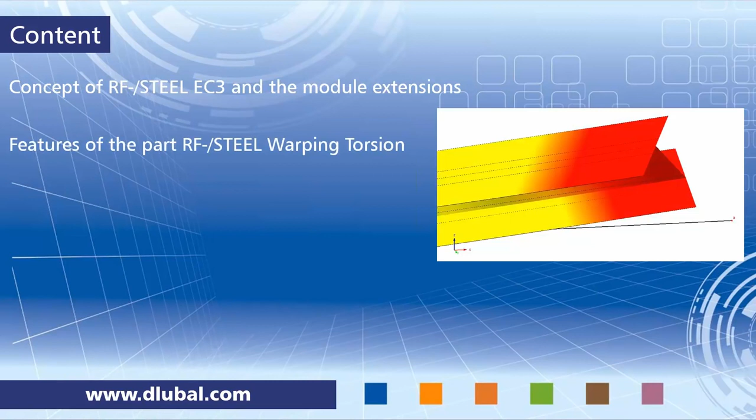We get started with the concept of the RF-STEEL EC3 module and its module extensions. I will then summarize a few features of the RF-STEEL Warping Torsion add-on module and the RF-STEEL Plasticity module. Then it's time for me to hand over the screen to Wieland, and he will show you an example in RSTAB, and he will perform stability design checks using the second-order analysis and employing 7 degrees of freedom. He will also perform a plastic design in RF-STEEL Plasticity.

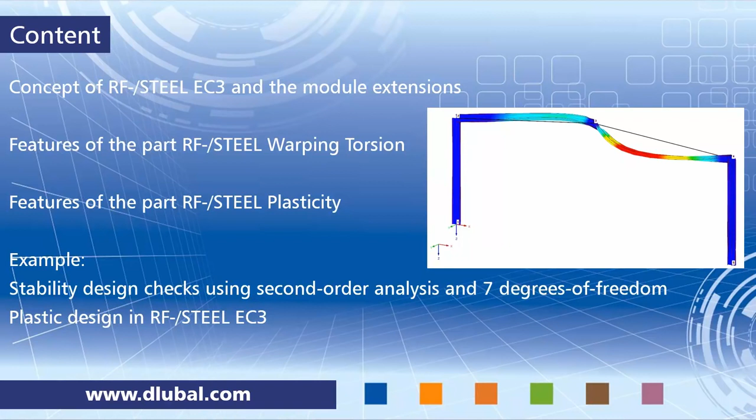Okay, let's get started with the concept. We have the add-on module RF-STEEL Eurocode 3, RF-STEEL EC3. Here you can design in accordance with Eurocode 3. You can perform stability design checks, you can do deformation analysis, and of course you can also do some fire protection analysis.

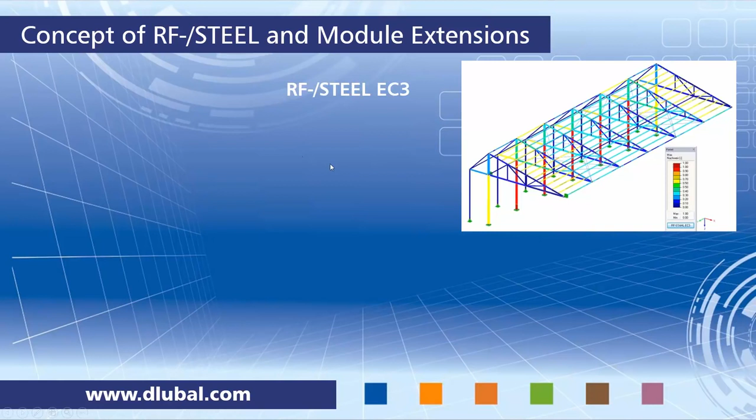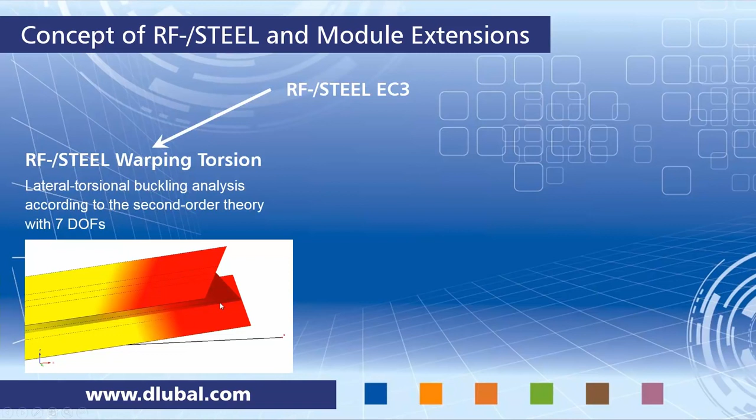And together with this add-on module you can enable 2 different extensions. One is RF-STEEL Warping Torsion. Here you perform a design with the second-order analysis under consideration of a 7th degree of freedom, that's warping torsion. And a second extension is RF-STEEL Plasticity. Here you can perform a plastic design of cross-sections. They both work either independently or you can use them in combination. And Wieland will show you this throughout the example.

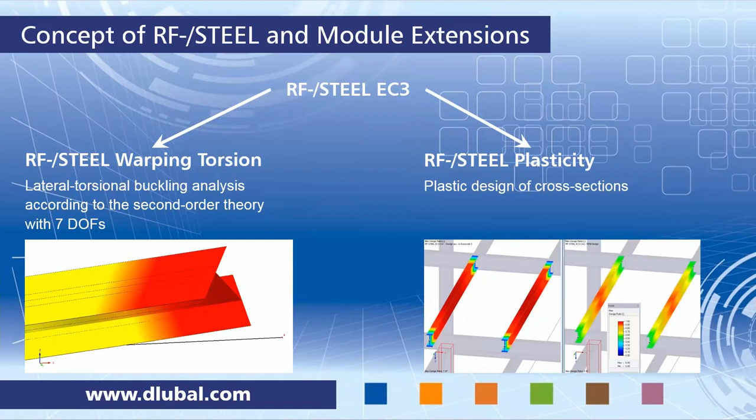To give you a bit more detail, here's a list of features available, and these are the features of the warping torsion extension. So you have a standalone solver, and this is considering 7 degrees of freedom. The 7th degree is the warping torsion degree of freedom, beside the usual translational and rotational degrees of freedom. And it is performing a nonlinear analysis in accordance with second order. You can enter imperfections, and in general this extension is available for thin-walled steel cross-sections.

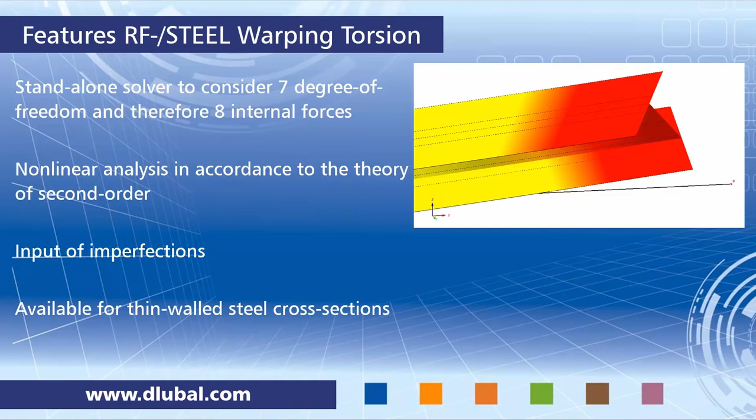For RF-STEEL Plasticity, we have different methods of analysis available. The main one is the partial internal forces method by Kindmann and Frickel, and this method is suitable for nearly all types of cross-sections. This method exists with and without a redistribution of internal forces, and a second method that is available is the simplex method. This is for general cross-sections, and another type is the analytical nonlinear optimization procedure, which is used for elliptical cross-sections.

So it's now time already to hand the screen over to Wieland. He will show you all the discussed things live in RSTAB, and just a side note, everything that is shown and discussed today is available in RSTAB and RFEM. So the add-on modules shown today are available for both program families. So now I hand the screen over and enjoy the webinar.

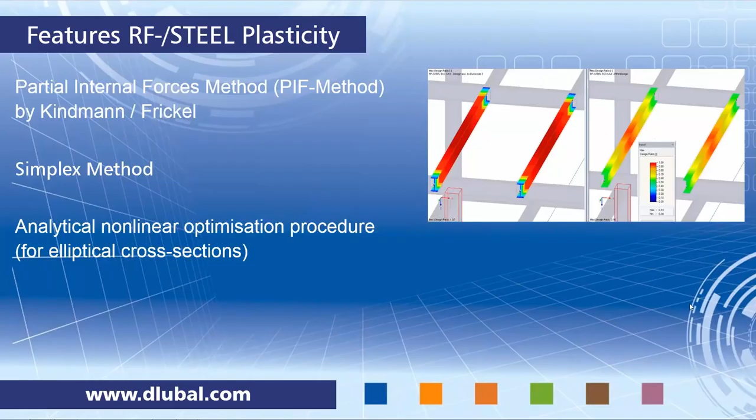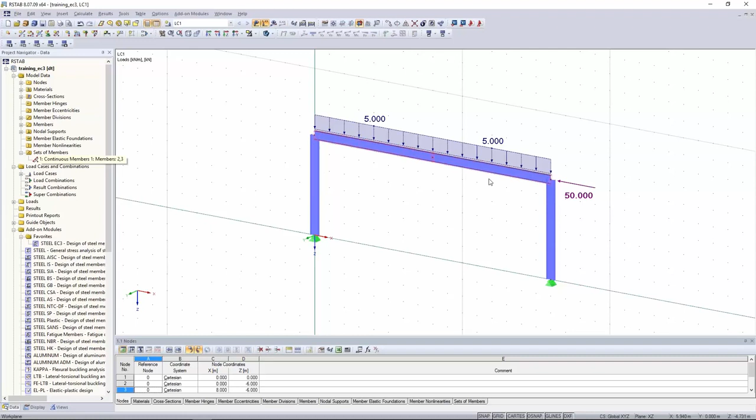So, thank you for the introduction, Gerlinde. Now it's time for the live presentation of this webinar, and I have already prepared the model to start with the steel EC3 design. You can see we have a very simple frame with a vertical and horizontal loading, just one load case. And I want to take a look at the horizontal beams, which we want to design as a set of members. It's not just one single beam, it is divided by one node, so I had to prepare a set of members to use it as one element in the steel EC3 design.

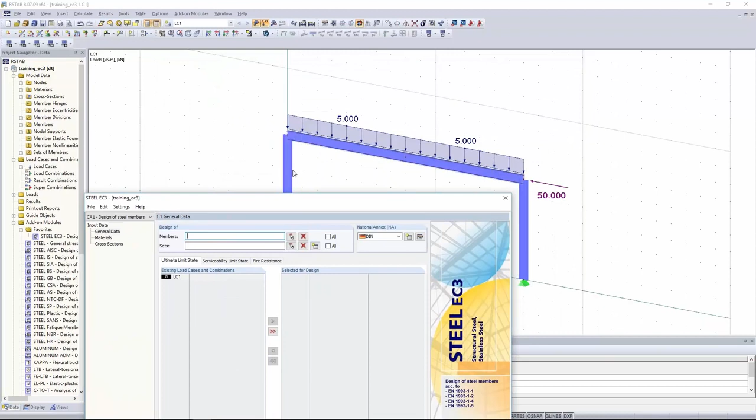Because some of you might see this module EC3 for the first time, we're going to start with just a basic design according to Eurocode 3, and then we want to do an upgrade to warping torsion and plasticity later in this presentation. So I've opened the module steel EC3. I have to select the load case which I want to design, which is the only one, LC1. I want to check my set of members, and today we want to design according to the standard in Eurocode 3.

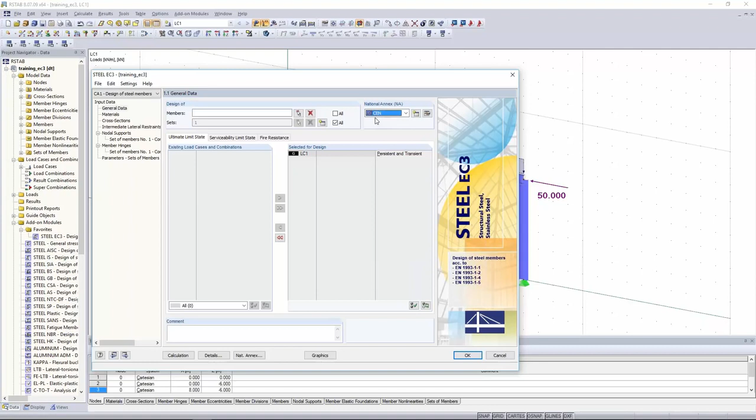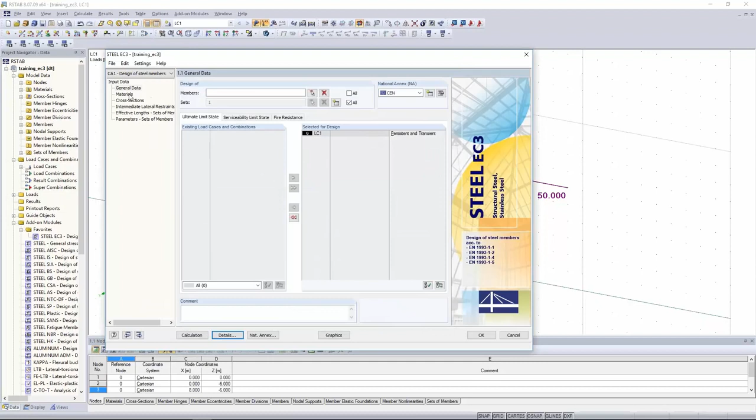In the first part of this design, I want to check this set of members not according to the general method. I want to design it according to the equivalent member method, which I can change in the stability dialog of details. Then I can continue to the next mask to check the material again, which is S235. This is fine. Cross-section is an IPE 500 section.

I have no intermediate restraints on this horizontal beam, so I can skip this mask. Otherwise, you can prepare intermediate supports along this beam as you wish.

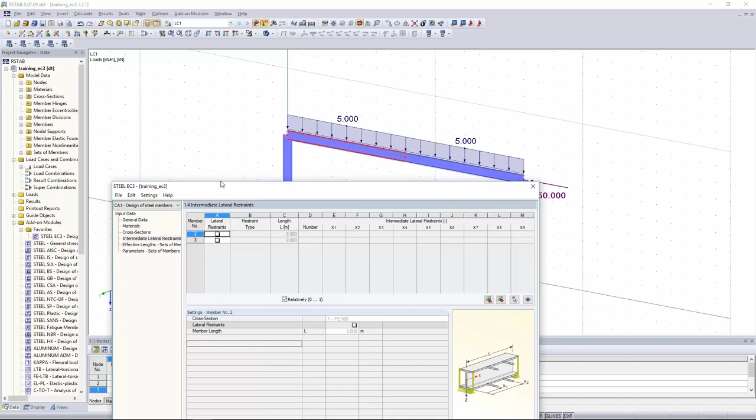In the next mask, which is effective lengths, you can define all the settings for buckling about y-axis, buckling about z-axis, and lateral torsional buckling in these columns. We want to keep it simple and design it as a simple fork-supported set of members. So all of these settings are already fine. We have buckling length factors of 1.0 in both directions, and the beam is simply fork supported.

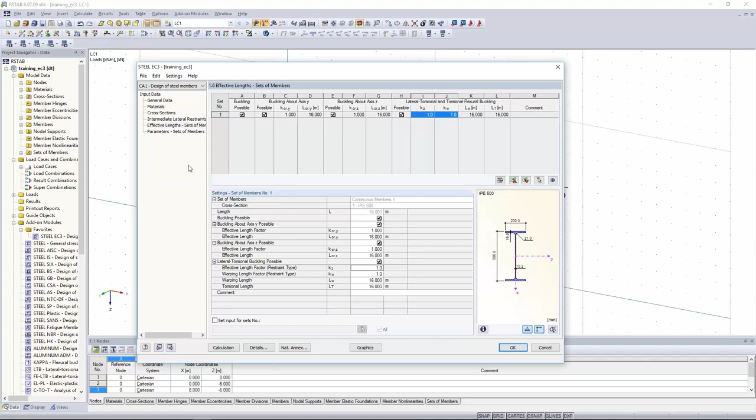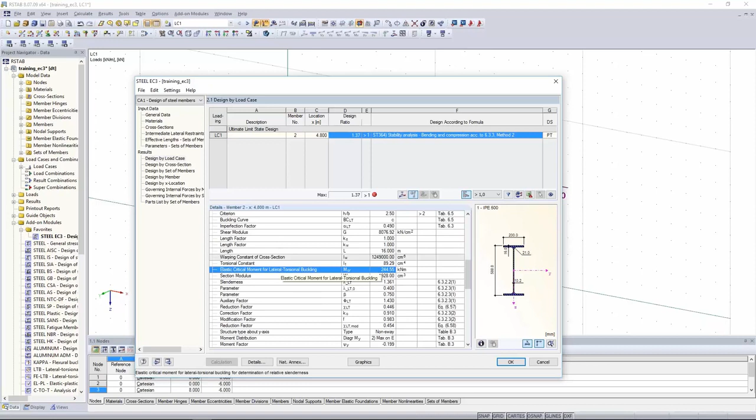So now I can just run the calculation, and you will see we have an overloaded horizontal beam, horizontal set of members here. We have a cross-section class 3, and you can check all the partial results in the design table on the bottom. So you have a part of the cross-section classification. You can see the critical buckling loads over there, and you can check almost every intermediate result in this table. You can export it, and also you can take a look in the graphic to check the results.

So there we have a class 3 section. I think this is at the place, X place, where there's no bending moment. Yes, so we have only compression force, and that's why the IPE section is assigned to class 3.

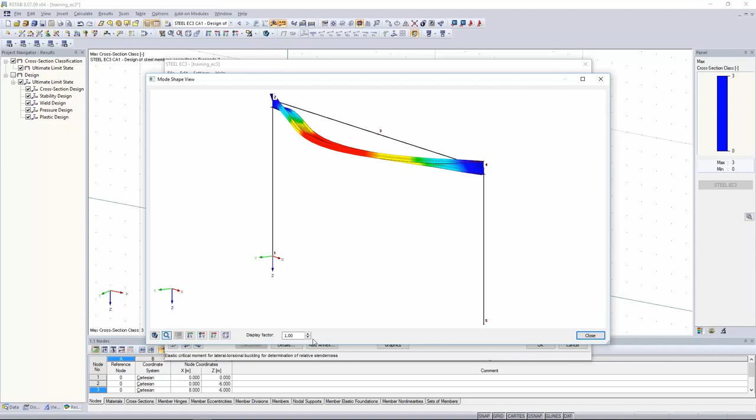Let's get back to the design module. If you want to check the eigenvalue solver, which is inside this module, to get the critical bending moment, M critical, you can check this button here, mode shapes, and you can see that there we have a lateral torsional buckling eigenvalue or eigenmode.

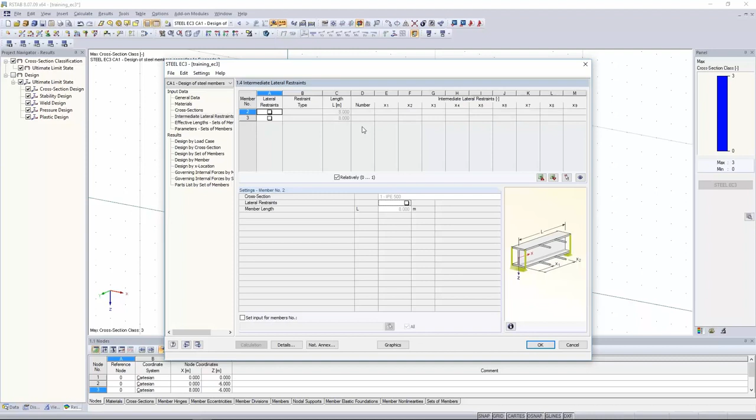And now the question is, how can I design this structure, or how can I stabilize it? Therefore you have several options. As I've said, you can place intermediate restraints as you wish, or in this example I want to show you the rotational restraint or the shear panel. For this example, I will take the rotational restraint, and therefore you can change to the component description over there.

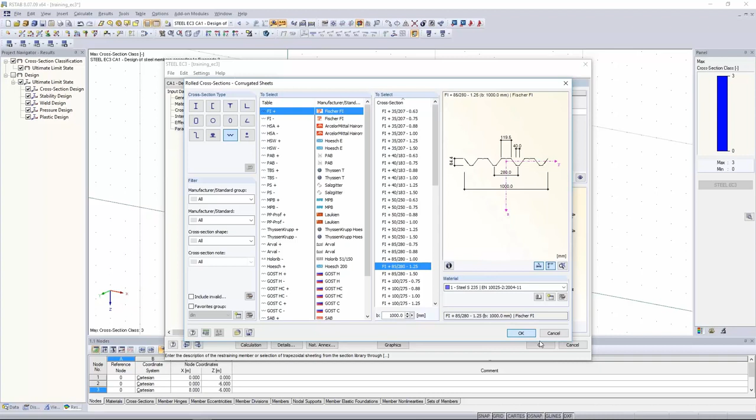And we want to take a trapezoidal sheet into account, which I can easily pick from the database. Let's say this is a Fischer trapezoidal sheet, 85/280, 1.25 thickness. That's fine. And the module will take into account all these values automatically. You just have to define a beam spacing, and maybe you want to change the C100 value according to Eurocode 3 Part 1-3.

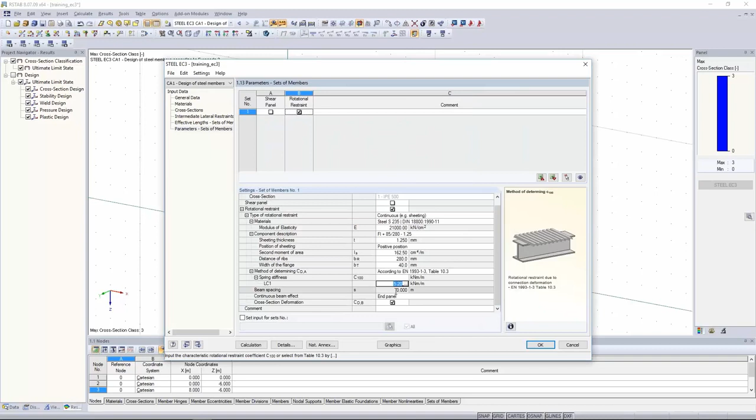Okay, I want to have a beam spacing of 5 meters, and then I can run the calculation again, and now you can see that this structure is already stabilized. We have a fulfilled design, and this is fine. You can also check the partial results of the rotational restraint over there, up to the total rotational spring stiffness.

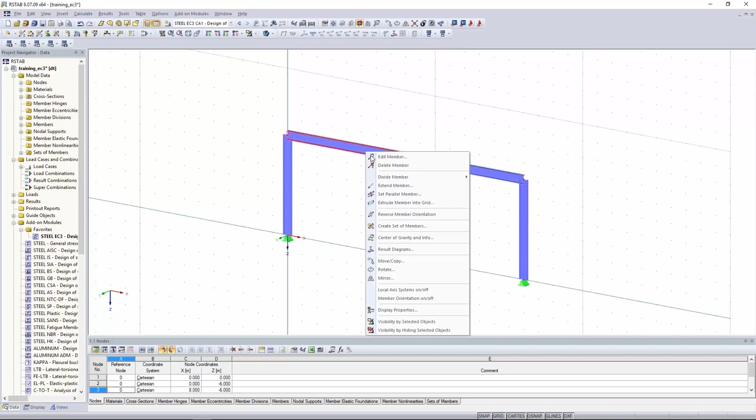All right. In the next step, I want to do a small change in the structure because I need some more spacing on the connection of the beam to the column. I want to prepare a taper at the beginning and at the end of the beam. Therefore, I just right-click on the member, edit member, right-click, divide member by distance, and I can easily change this value to 1 meter and this one to the same, divide member by distance at the end, 1 meter.

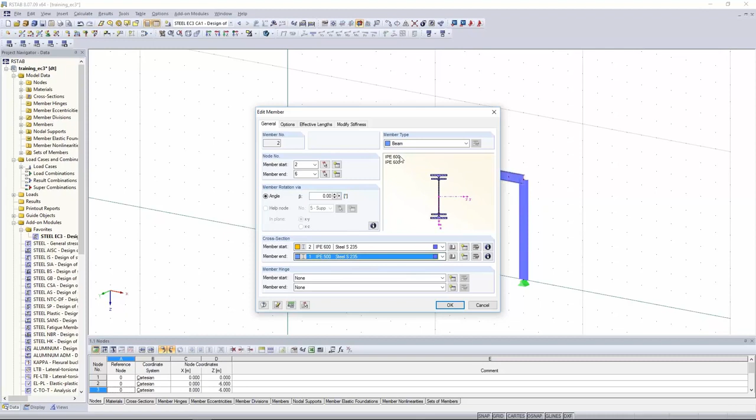To define the taper, I can just change the cross-section at the beginning, IPE 600 now, and IPE 500 at the end, and the program will automatically define the taper over there. Same thing on the right side, not at the column, on the beam. IPE 600 section at the end of the beam. Now I want to run the design again.

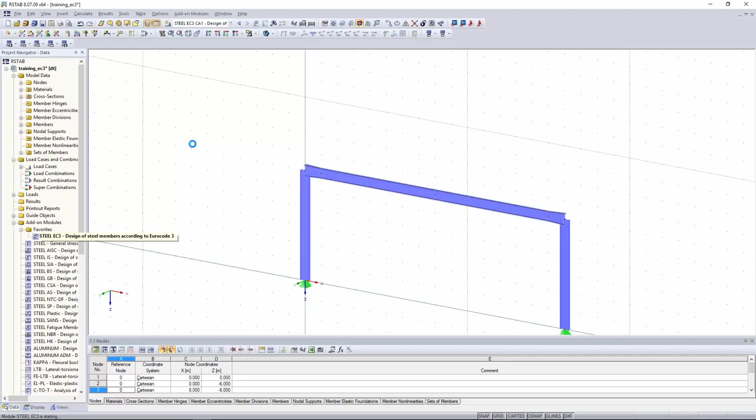The question is, in the first design, we had a design according to the equivalent member method. We had bending and compression, and this is according to chapter 6.3.3 of Eurocode 3. And this chapter is only valid for uniform members. Now we have a tapered member, and we have to change this because it's not valid anymore. If you have a taper, you can use the general method.

Click on OK, and you will see for the set of members, it changed automatically to nodal supports. And this is a different method from the last one. It's not the equivalent member method. General method means you have a design according to chapter 6.3.4 of Eurocode 3, and therefore we have to place some nodal supports to get the equivalent system for the eigenvalue.

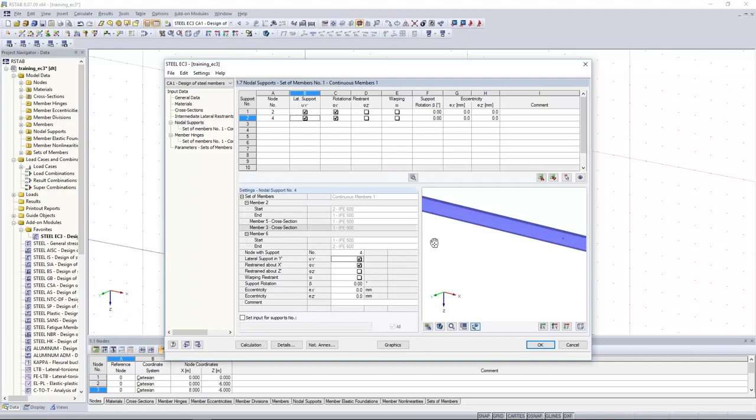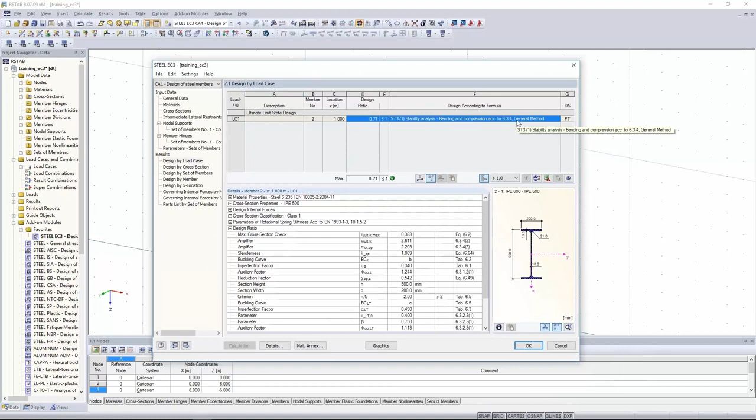You can check these nodal supports graphically in this view. As you can see, we have the whole frame over there, but by clicking on local coordinate system, you can change to view the nodal supports, and you can check them. But in my example, these default nodal supports are already fine, and I can just design this set of members by clicking on calculate. So also for the tapered member, we have a design according to the 6.3.4 general method, which looks a bit different. There's a small issue with the graphic there, but as you can see, it is also possible to have a design for tapered sets of members.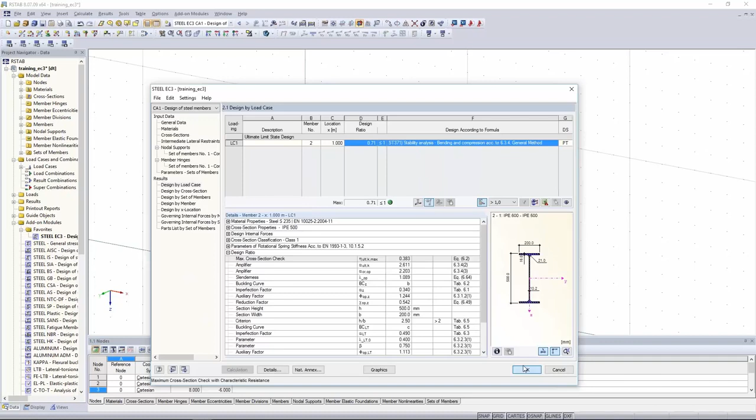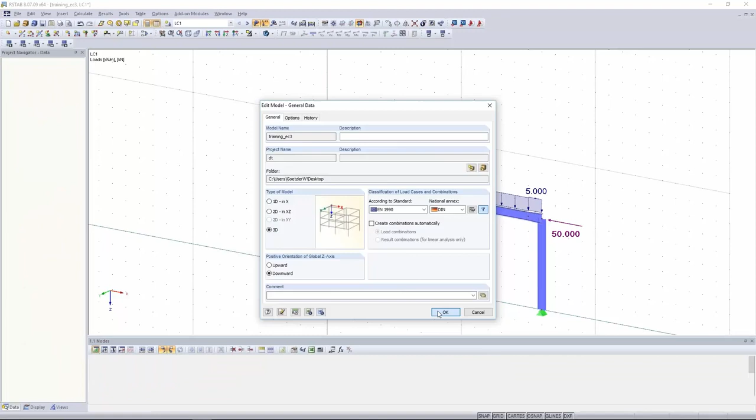Now we have to follow a more specific problem of the structure. We want not just to define the transverse loading and the horizontal loading, we also want to take some cross-bending into account, and therefore I right-click on General Data, change the structure to 3D, and have to define some nodal supports to support the frame out of plane.

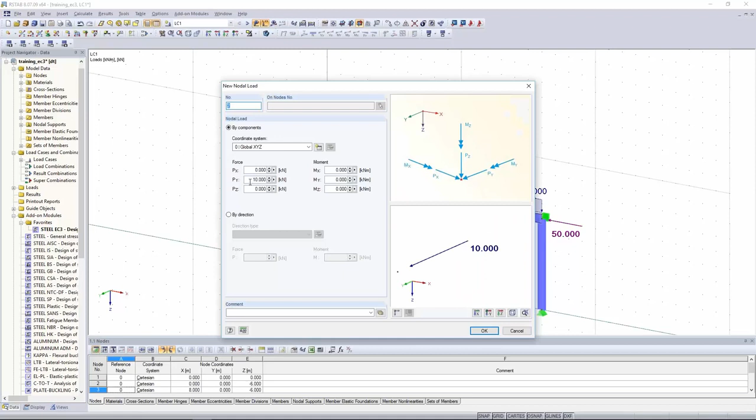And therefore I can just define the loading out of plane, which is 10 kilonewton in this example, in the center of this horizontal beam, which is quite a bad loading in this position, but we will see how to define it, how to design it.

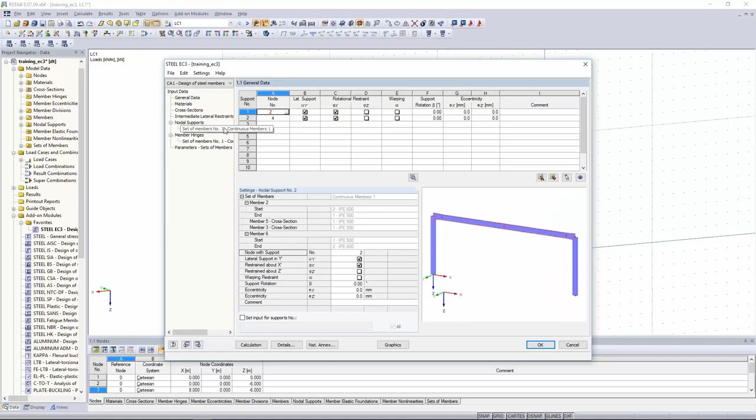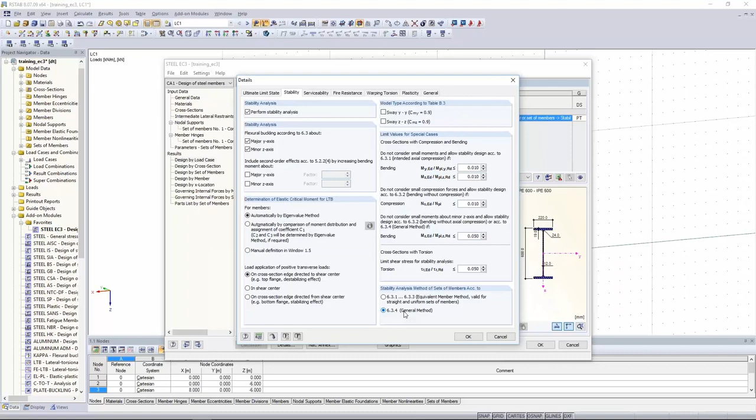First of all, we want to try to do the same analysis again, just by running the calculation again. But there's a warning message coming up, which says that there's a moment about the z-axis, of course, and this is not allowed for this design method. Yeah, the design according to chapter 6.3.4 allows only a loading in plane, and this bending moment Mz is due to a loading out of plane.

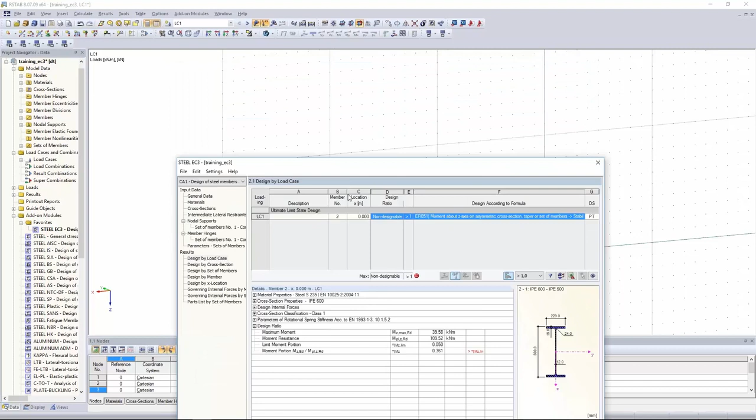And now we come to the problem where you probably need this new module warping torsion, because the question is now how to get this design done for this loading and this model. And there's one really easy solution in Steel EC3 now with this new module warping torsion. You can see over there we have quite a lot of cross-bending with about 36% of the resistance and plastic. So we cannot say, okay, I want to neglect, let's say, 10% of the cross-bending over there. This is not a solution.

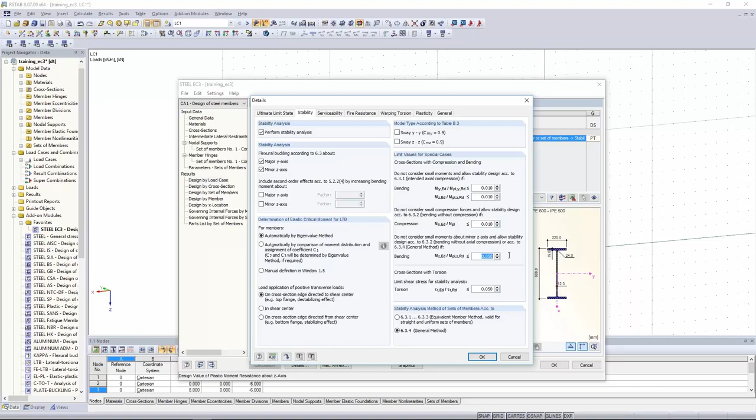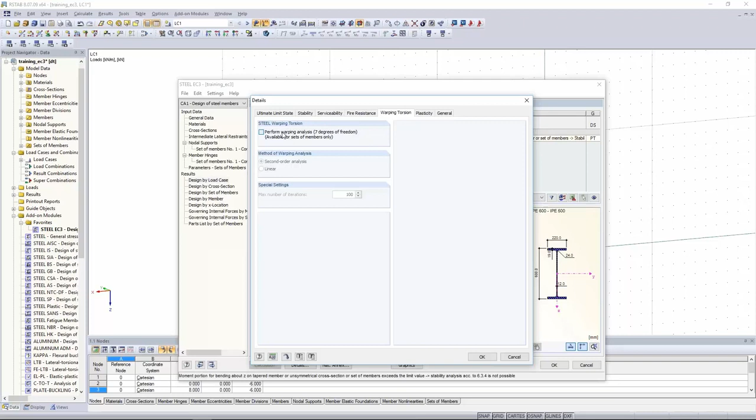The warning message will pop up anyway, and no, we cannot say, okay, I want to neglect the 36%. We have to take it into account, and therefore I will just activate this new module, Steel Warping Torsion. In details, warping torsion, you can do this one. Over there, just activate the checkbox. Okay.

Now we can switch to the nodal supports again. And it's basically the same as in general method, but you can see that now we have not just 4 columns with 4 degrees of freedom for out-of-plane stability problems. We have all 7 degrees of freedom. That means all the deformations, all the 3 rotations, and the 7th degree of freedom, the warping. We have to check the boundary conditions again, which is fine in this example, I think. Let me just remove the

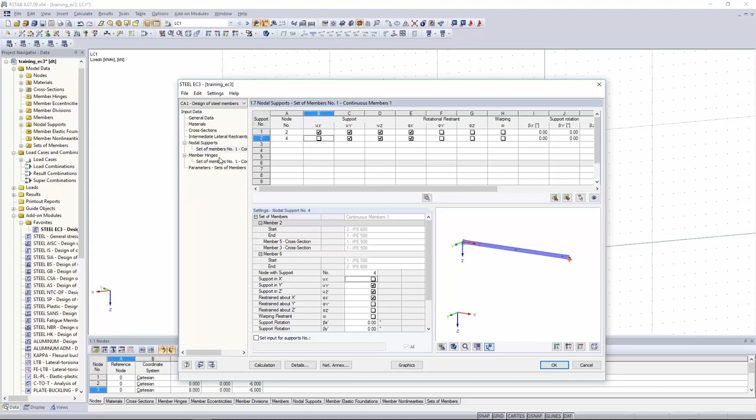deformation in local x-axis. And now what we want to do with this module is we want to perform a stability design not with the equivalent member method or with reduction factors χz, χLT, and so on. We want to do a second order stress design, and there's a last question coming up now, and this is how to define the imperfection. Because for a second order analysis you need to define this one, and this is done by applying this initial bow imperfection according to the first eigenvalue or eigenmode of the structure.

Let's say in this example we want to do the design according to L/250 of the length of this eigenshape. And this is the value you will find in the national annex of the Eurocode. So in Germany, for example, there's a table where you can find this value which says, okay, you have h/b of the section bigger or smaller than 2, and you will find exactly this L/200, L/150, and so on in the table.

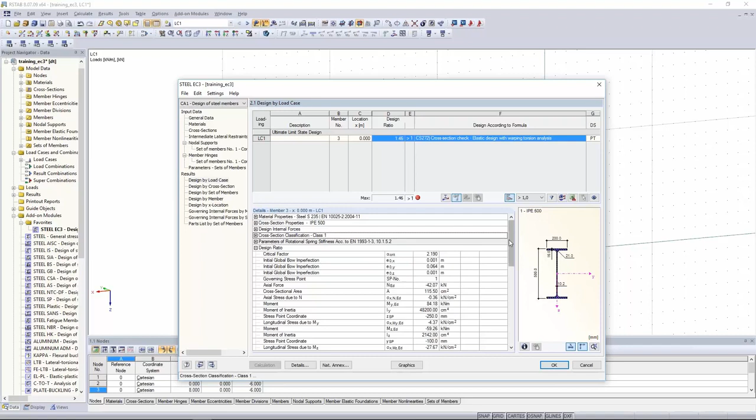And after we've defined this initial bow imperfection, we can simply run the design again, and now you can see there's no warning message coming up, but it's, let's say, slightly overloaded by over 50%. Now we are around 146%. And in the bottom you can see we have the rotational spring stiffness taken into account. We have section class 1 now, and there's a critical load factor of 2, which seems fine.

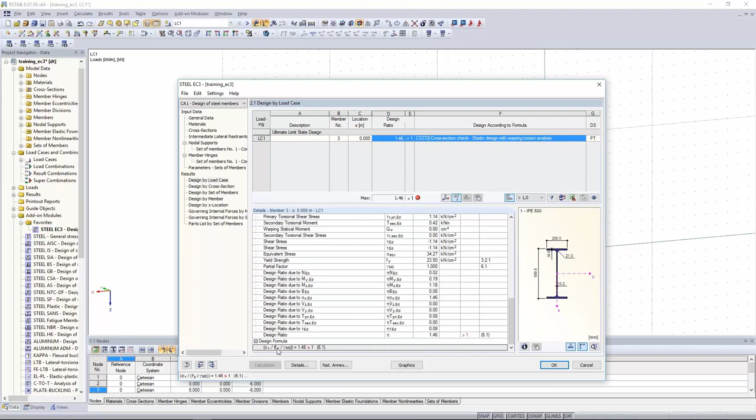The checking of the initial bow imperfection, and in the bottom of this table there's all the stress design. Yeah, you can see all the partial ratios due to normal force, due to bending moment, and so on, until you get the full design formula according to equivalent stress. You can check it also in the graphic. This is the section classification, which is fine, but now we have just elastic stress design, so it doesn't matter if you have a section class 1 or 3.

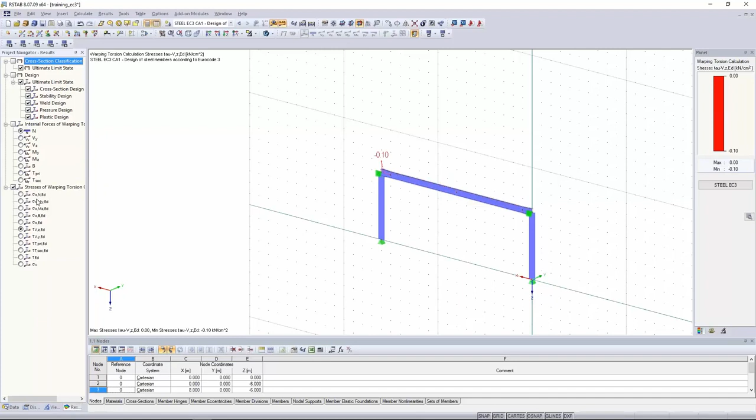You can check the internal forces of this new calculation up to the bimoment and so on. And you can check all the stresses from normal stresses to equivalent stress in this tree on the left side.

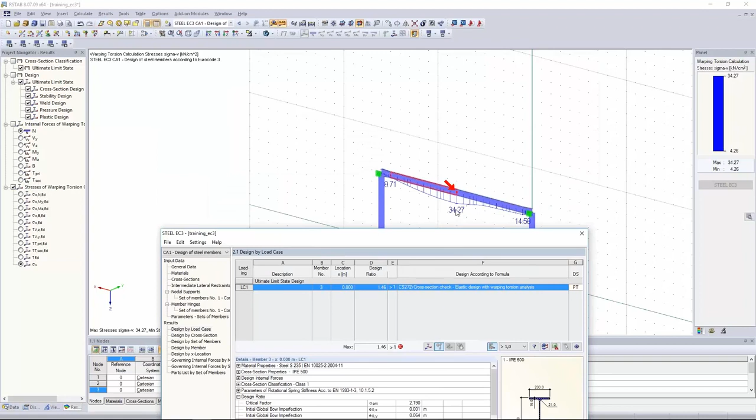So what this module is giving you is the opportunity to check all the critical cases in EC3 which you cannot design before. That means, as you can see, we have a bending around the weak axis on the tapered section, which is not possible to design according to the equivalent member method. You can have a general cross-section, maybe from our cross-section program SHAPE-THIN, which you cannot design before that. All these cases which might lead to a warning hint, undesignable, these are possible to design now with warping torsion.

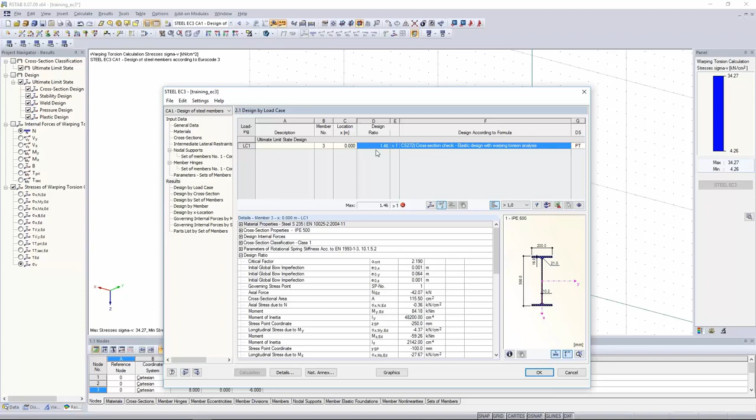To give you a better chance to get a better design, there's another upgrade called steel plasticity. This might help you to improve this design over there. Now we have about 150% loading, and we want to check if there's a possibility to get this design fulfilled somehow. And as I've said, we have this class 1 section, which is fine, but we only have an elastic stress design in warping torsion. So what we want to take into account is the plastic resistance of the cross-section, and this is what we can do with the module steel plasticity.

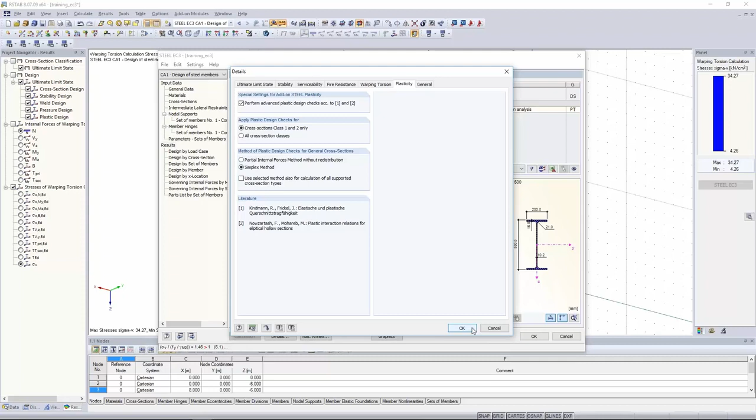So I want to activate this additional part of EC3 module over there, and you can decide if you want to do a check for all the cross-section classes or only for class 1 and 2. And you can check also general sections like SHAPE-THIN sections, C, Z sections, whatever. You can choose the simplex method for these sections. Okay, and you don't have to do anything else because in details warping torsion is still active, so we will use the warping torsion internal forces to get the design done with the plastic resistance of the cross-section according to the partial internal force method.

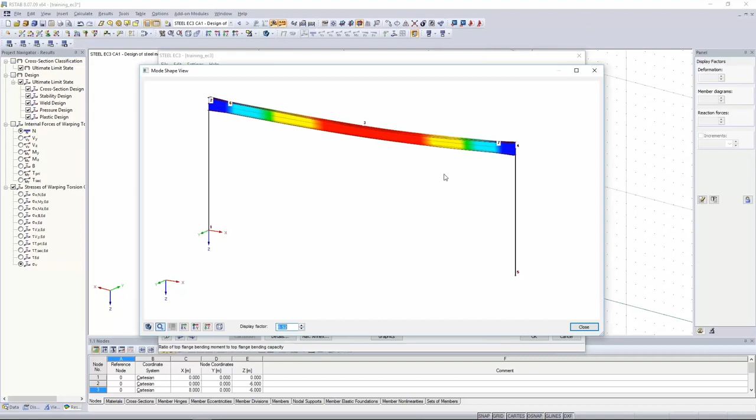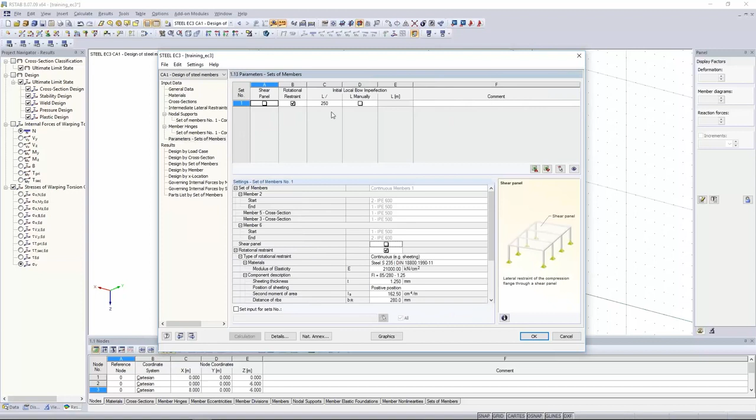And just by clicking on calculation, you can see that this design is now fulfilled. We have a plastic resistance of the section, and with the partial internal force method, it was possible to get this design done. And this is quite a nice feature. Now also the eigenshape is working again, this graphic, and of course we still have a lateral torsional buckling eigenshape, but now it was possible to get this design done with the aid of warping torsion to get the second order internal forces, with the aid of imperfections, and with the module extension plasticity.

So let me just summarize a bit. The EC3 module gives you a lot of opportunities to get all the designs done for all the sections which are mentioned in EC3 code and all the loading which is mentioned in EC3 code. That means all the I sections, all hollow sections, and bending around all the axes and normal forces are not a problem in EC3 module.

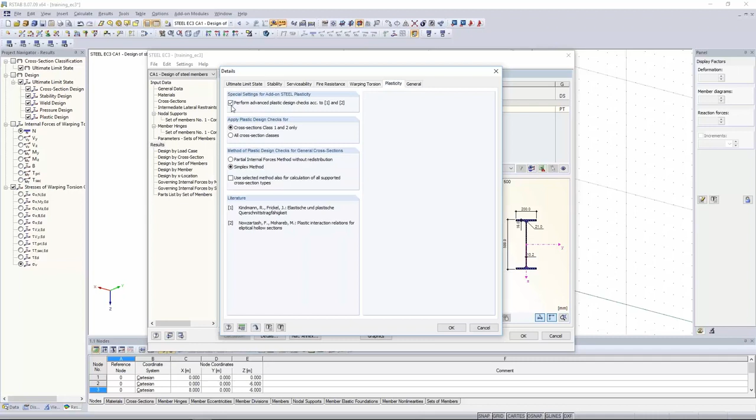If you have a bending moment around the Z-axis, if you have torsion, which is a big topic, if you have unsymmetric sections, SHAPE-THIN sections, all the general sections, and you have a loading with bending and compression, you might need warping torsion, and this gives you a solution to get the steel stability design done all in this module. And to get even the plastic resistance of the cross-section and take this into account for this second order analysis, you can choose also steel plasticity.

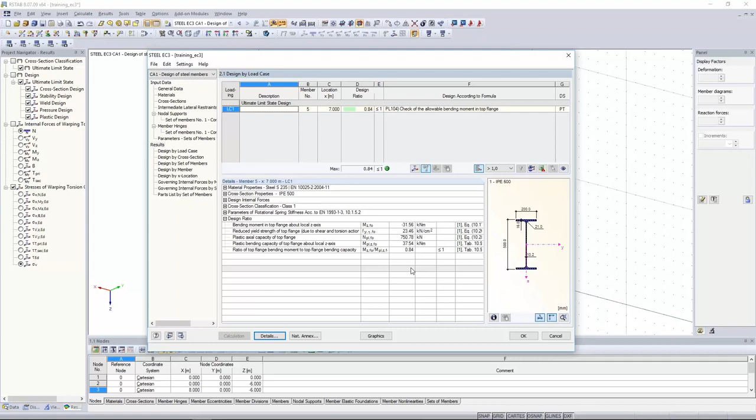Many thanks, Wieland, for the very interesting webinar. You also summarized the advantages very well at the end. With the Warping Torsion extension, you are able to design cross-sections that were non-designable beforehand. And with the Plasticity extension, you are able to use the plastic resistance limits.